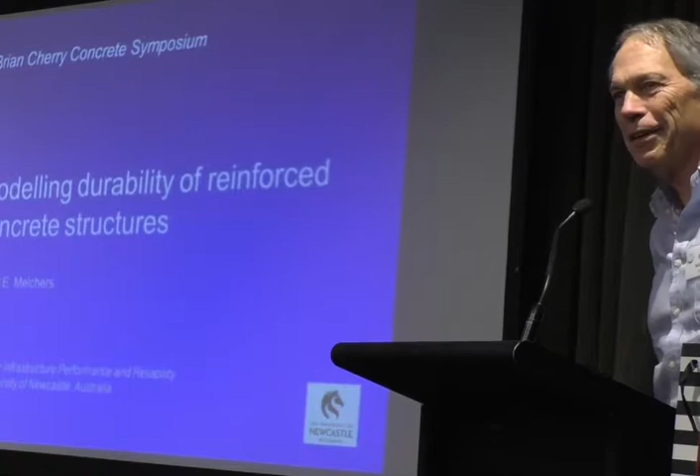Thank you, Bruce, and thank you, organisers, for inviting me to come and say a few words in honour of Brian. As Bruce has already mentioned, I first met Brian when he was brand new at Monash and I was a brand new research student, and he came walking in there and I could hear him coming, and I thought, this guy's from Cambridge. It was kind of scary.

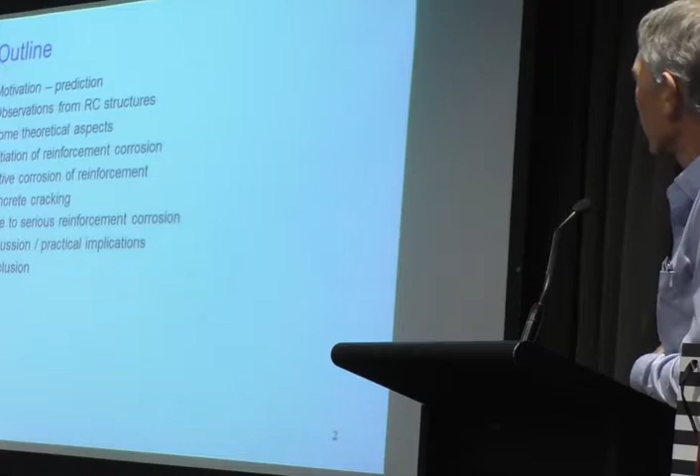Okay, I'm a structural engineer by background, and I'll later on explain to you why I'm actually looking at this. But let's talk a little bit about what I'm going to talk about. I want to talk about the background, why we're actually doing this, some observations from real reinforced concrete structures, not just experimental work, a brief rehash of just a few experimental aspects which have already been covered in a sense by previous speakers, but they're important. Then I want to focus on two areas: the initiation of reinforcement corrosion, and I want to separate that from active corrosion, and Warren's already told you about that a couple of times this morning. And then say something about concrete cracking, because I think that's an area that we have kind of overlooked, and I think it's really important. Then the model, if you like, which is extremely simple, and then some practical implications.

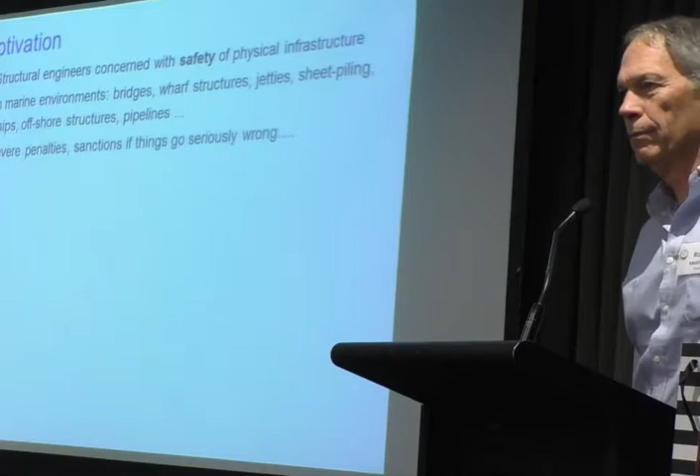So let's talk about why we do things. Structural engineers are concerned with the safety of physical infrastructure, buildings, bridges, you name it. There's a whole host of them. And if we get it wrong, in some countries I'll get shot, in other countries I might go to jail or get a heavy fine. So it's not a picnic. We've got to get it right.

And increasingly, we're talking about the lifetime management of structures. It used to be once you just build it and forget it, and someone else many, many years later picks up the dregs of what you've built, what's left over. Increasingly that's changing, and increasingly there's now emphasis on, can we predict at the start, when we even are designing the structure, how long it's going to last and what we have to do to make it last a long time. What do we mean by a long time?

For most structures, buildings, bridges and so on, maybe 100 years is the maximum. But if you get into that business about nuclear waste containers, for example, you're talking an awful long time. And I don't know how we're going to predict that, but fortunately I don't have to worry about that. But we do talk to some of the nuclear corrosion people, particularly in Europe, who are very much worried about those sort of lifetimes. The main materials, as we've already been pointed out, are reinforced and pre-stressed concrete and structural steels. I'm not going to say anything about structural steels, but they sit in there as an important component.

We've heard a lot about CP of various sorts and coatings, and that's great. But I remember some years ago having a couple of days with a senior bridge engineer from another state, and we looked at lots of bridges, mainly reinforced concrete bridges, and he said, oh, these have got cathodic protection on them. We don't know anything about it anymore. The systems don't work anymore. It's all deteriorated and we don't know what to do. If only we didn't have to have this stuff.

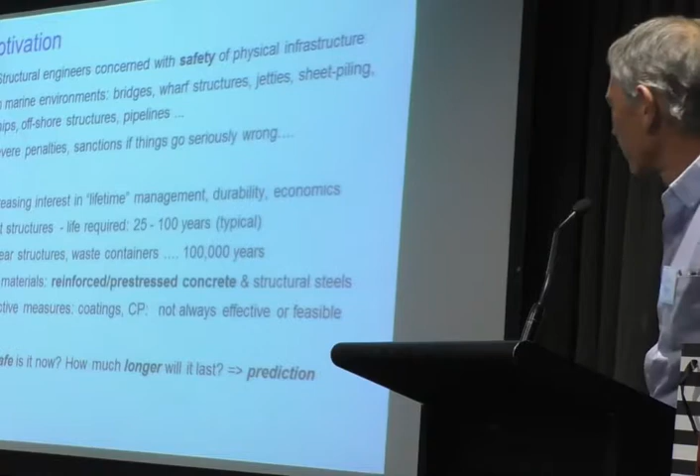So, our question is how safe? Not only just how safe is it now, but how much longer will it last, and that requires, obviously, prediction. I can say anyone can predict, but at what accuracy? And what we don't want is hocus pocus. There's an awful lot of people out there who are selling hocus pocus. I think some of you all know what I'm talking about.

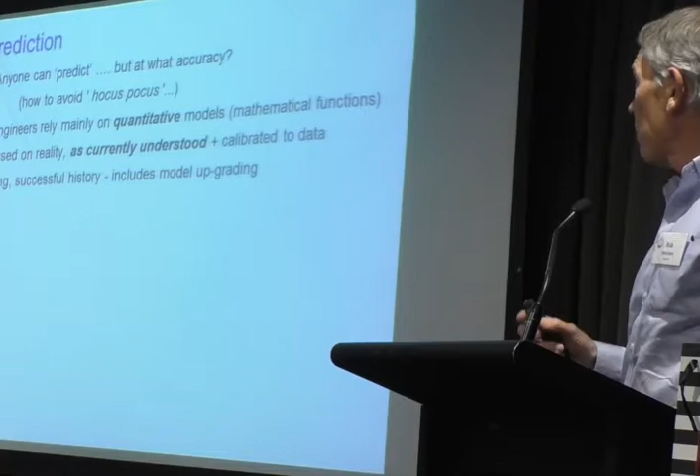Engineers rely mainly on quantitative models, in broad terms, structural engineers in particular. They are based on what we currently understand, and they are calibrated to real information, information that we get from the field and from past experience, sometimes from the laboratory, but the field experience is really important. There's a long and successful history, certainly in structural engineering, of doing that. And it also includes that the models get upgraded as time goes by. So we learn from previous experience, the old models have got to be upgraded in some way. And that's relevant, I think, to what I'm going to say today.

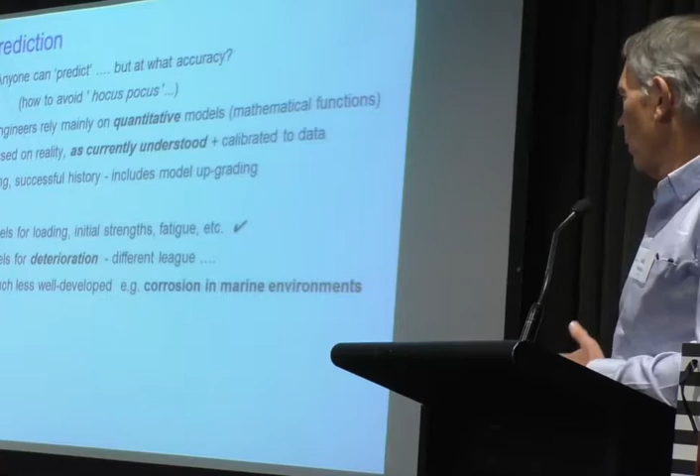The models for loads, for strengths, when we first build the thing, and for fatigue and so on, are pretty well understood, but the models for deterioration on the whole are rather bad. They're not very well developed at all. Corrosion is one of those, and I'm going to talk only on corrosion in marine environments. Typically the corrosion literature will give you things like, oh, it's very corrosive, or it's medium corrosive, or not corrosive. Well, I'm sorry guys, that's not good enough for us. We need to be much more specific. And also you get things like, well, this is better than that, that's better than something else. That's also not good enough. We need to be able to do better.

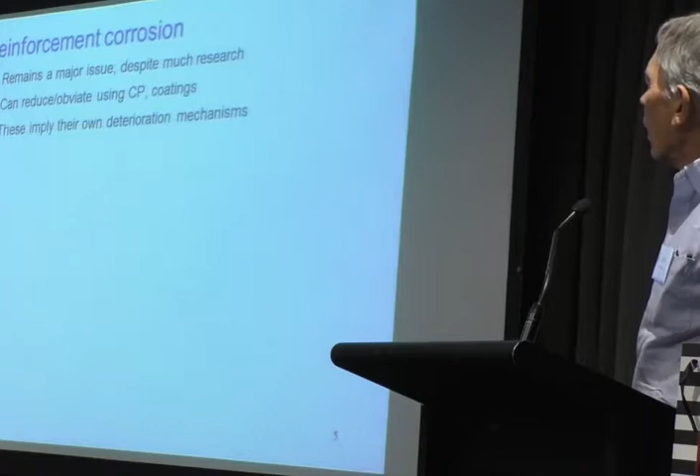So, quantitative prediction, reinforcement corrosion, as we've heard, is a major issue still. I didn't know what anybody else was going to say. But we can reduce it. Their own deterioration mechanisms, I've mentioned that already.

Research approaches. How can we actually look at corrosion behaviour? We can do it in a laboratory, and typically that implies relatively short-term experiments, a year or 2 or 3 or whatever. That's already a long time. And if you think about most PhD programs, they run for 3 years, so you can't design a program that runs for more than about 2.5 years because you've got to give the poor devil time to write up. Then you have to ask the question, how relevant are those results in terms of practice if we're talking about 50 or 100 years for the real structure?

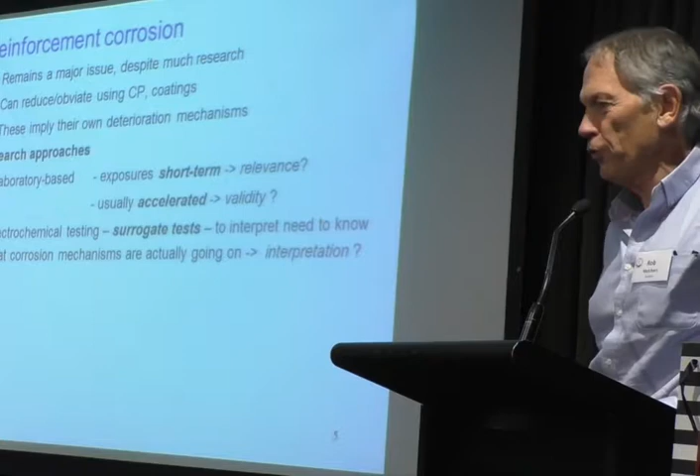We can accelerate them. We can apply currents, for example, to the reinforcing. And then the question is, how valid is this? I've got some bars sitting in my office, reinforcing bars. One lot came out of a real structure that had been exposed in the 1930s and was dug out of the concrete, I don't know, about 10 years or so ago. And I've got another couple of bars that were in a reinforced concrete slab that one of my colleagues tested in our laboratory with impressed current. And you just feel the surfaces and they're completely different. And you think, on that basis alone, what can we say about accelerated testing?

It's dubious. The other thing that's often done, and you've heard a lot about this, is electrochemical testing, but you've got to remember, you've got to put it in context. And if you look up some good books like Scully and Kelly's book, for example, and some other works, you'll see they are actually surrogates for the real thing, and they have to be interpreted. Now, you can't interpret them if you don't know what the actual behaviour is. So there is a problem.

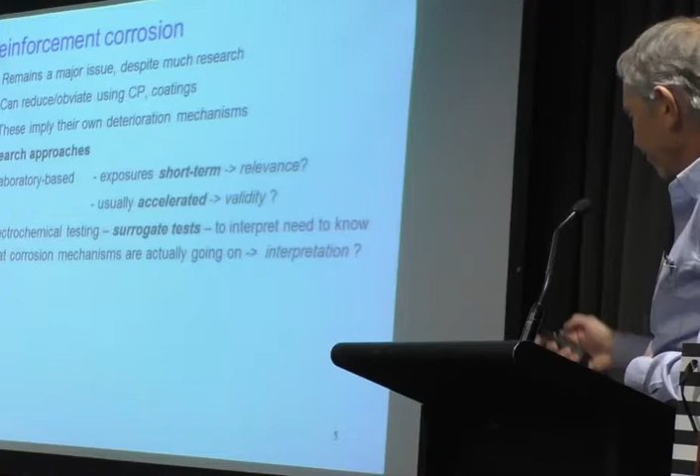The other approach, and the one we're really following, is what we might call an archaeological type of investigation, where we look at real structures, existing structures, particularly ones that have survived for a long time, and ask what can we learn from that. The only problem is we've got to reconstruct the context, the period of time over which this thing survived, what actually happened to it in its whole life up until the point that we look at it.

That has some issues, but fortunately for most of the things we look at, we can pretty well say it's more or less the same as it is now, unless we know there's been a major change of use or something like that. For many structures, they have more or less the same environment as when they started. Forget climate change for a minute.

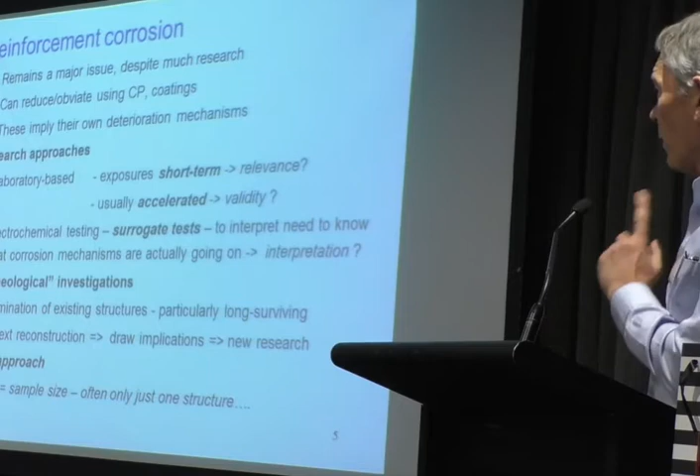So that's our approach. Now one of the problems with that, typically, is sample size. If you look at just one structure, you say well that's what happened to this thing, but if there's something slightly different about it, would we have got a different result? Fortunately, we have been able to find just a few cases where we have big sample sizes.

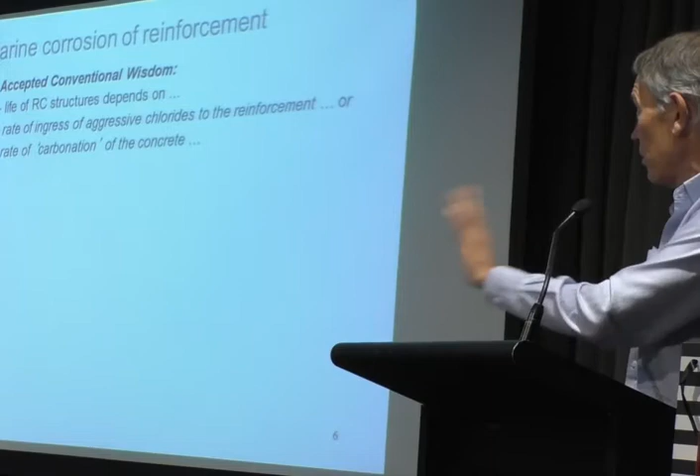The accepted conventional view is: the life of the structure depends on the rate of ingress of aggressive chloride to the reinforcement, or the rate of carbonation. The professional opinion is to reduce the ingress via diffusion, use dense concretes with high cover, use additives perhaps to reduce pore spaces. I'm not going to disagree with any of this, but what I'm going to focus on is why.

Sorry, something seems to be going on. I seem to be pressing the wrong button.

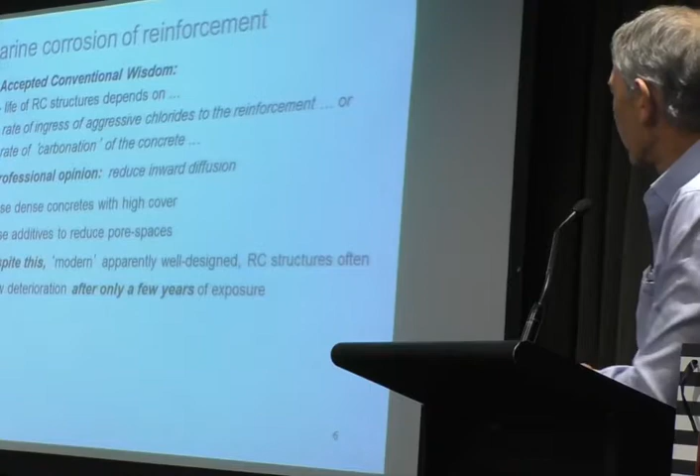Despite all this that we know, if you look around there are lots of concrete structures that haven't survived for very long, maybe 20, 30 years, and then they're in a bad state. So there's something we're doing that doesn't guarantee long-term behaviour necessarily.

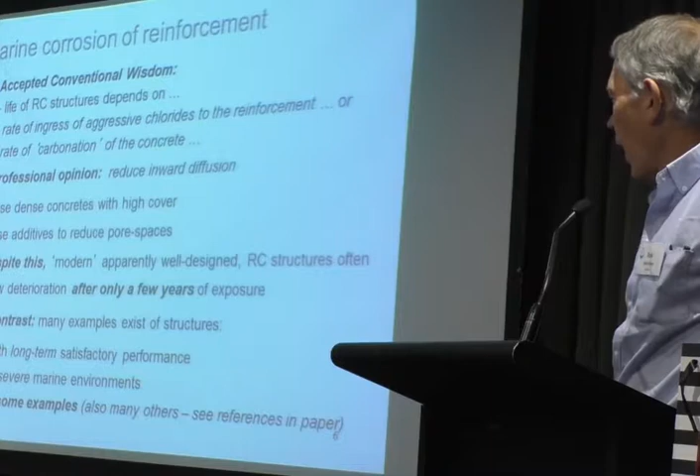But if you look around some more, there are some structures that have lasted a long time, in quite severe environments, and I'll give you some examples of that. I think we need to understand why those have lasted such a long time.

Now, in the paper you've got there's a different example to the two I'll give you, just so we have a broader case, and there are lots of other examples in some of the papers I refer to, because we have systematically gone through a lot of structures. I'll just give you two, including our most recent one.

This is the Hornibrook Bridge, built in 1935 just north of the city of Brisbane, I think in a suburb called Redcliffe. It's called the Hornibrook Bridge because it was built by a supervising engineer and financed, I understand, by Sir Manuel Hornibrook, who has a well-deserved reputation, at least in structural engineering in this country. It's 2.7 kilometres long, on Bramble Bay.

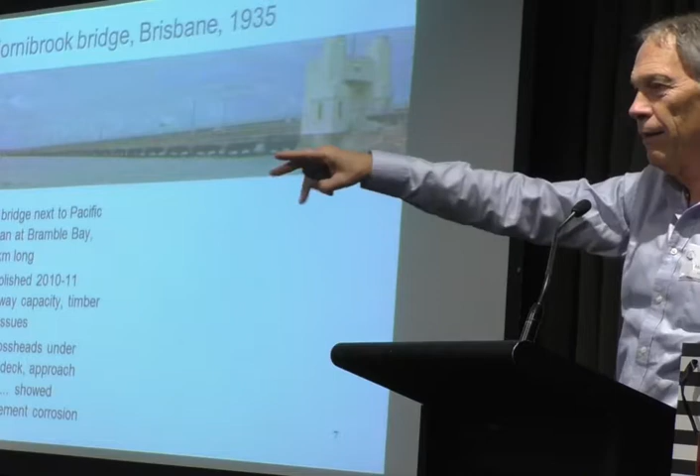It's right next to the Pacific Ocean on the other side, and there's quite a large tidal range. At low tide, at the bottom of all those piles you can see there, you can see the sand. So there's a big tidal range, and this is supposedly the worst exposure environment you can have for reinforced concrete.

It was demolished in 2010-11, basically because the superstructure was a timber road bridge that was already totally inadequate, too small, and all that sort of stuff, and for political reasons they decided to pull the thing down. We were alerted to that by an engineer in Brisbane, who said come and have a look at this — the piles they're pulling out are fantastic.

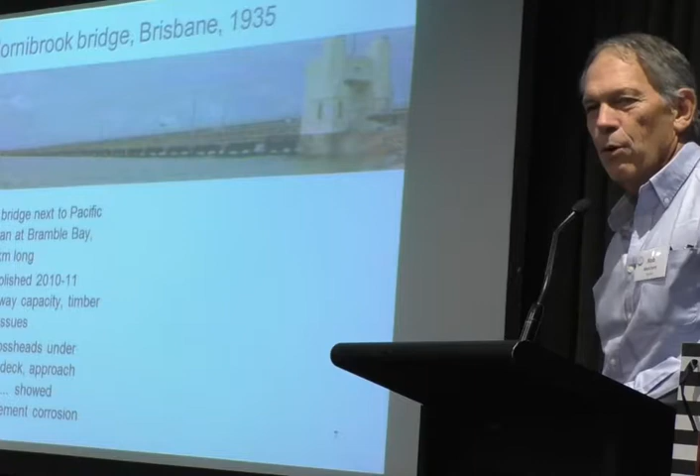There's no sign at all of corrosion. So this is 80 years. The crossheads, they weren't quite so good.

These are the reinforced concrete beams on the approach spans, and these are the three piles with the crossheads. The crossheads aren't too bad, and the beams here are not terribly great. But then we look at the piles, and there's virtually nothing wrong with them.

It doesn't say so on the slides or in your notes, but Warren reminded me before to explain why there's a difference. The big difference is that the piles are Class A concrete — they've got much more cement than the rest of the structure. The crossheads and approach beams are Class B concrete, so they have lower cement content.

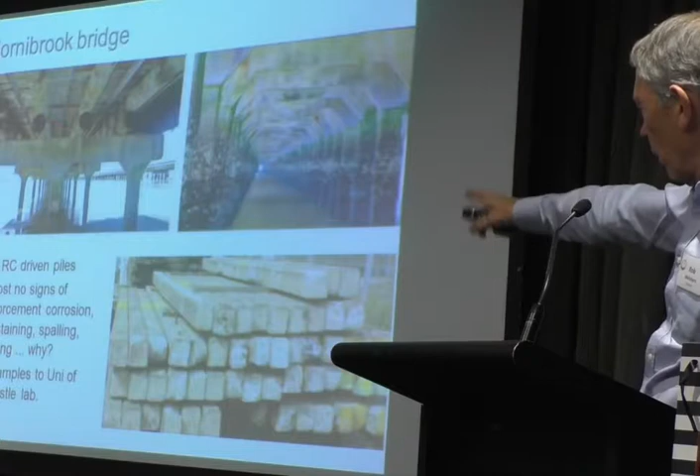I'm just going to focus on the piles. There are nearly 900 of them. This is just a snapshot I took when I visited the demolition yard. You'd be hard-pressed to find anything that's got anything wrong with it — they're all in fantastic condition, and these were in a tidal zone, remember.

So the question is why — what's going on there? We were able to persuade the department up there to let us have some random samples. They just selected the piles and sent them off to the University of Newcastle for us to look at in detail, which we did.

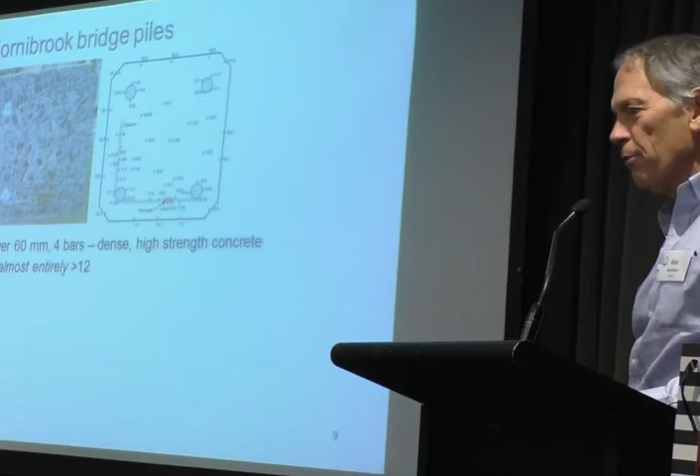Now, this is just a typical example. You can see the concrete on the left-hand side, a cross-section of the piles. They were just cut with our massive concrete saw. There's virtually no sign of reinforcement corrosion anywhere, just a little tiny spot at the bottom where one of the ligatures has got a little bit of corrosion.

The other thing that's noticeable is that all the pHs on the surface here are all around 12. Now this is after 80 years, right?

The concrete chloride levels were way above threshold level. Way above. Doesn't matter where you look, it's above a threshold level. I think the normal threshold level is about here somewhere in this range. And the bars are about there.

The concrete was extremely hard. Our lab guys got them to dig out some of the bars, as you can see down the bottom there. They busted the bits on the jackhammer. The concrete was 60 MPa or so.

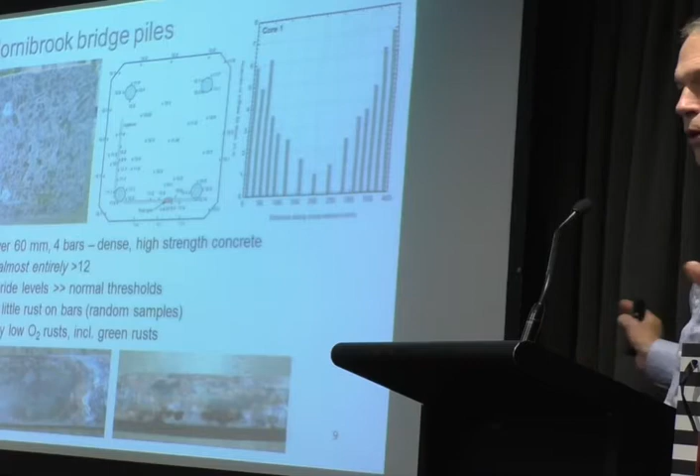The bars that were recovered showed either no corrosion at all, like the day they were put in, or they had a little bit of rust that was basically, as Warren mentioned earlier, like green rust. Now, green rust, you've got to remember, only comes about when you have virtually no oxygen. So that means there was virtually no oxygen in that area at all.

However, and I'll come back to this case later, one of the piles, when it was being pulled out of the ground by the demolition contractor, showed something they didn't expect. He said to me, come and have a look at some photos I've got in my office. I thought, this could be interesting. But these are the photographs.

What he found is that when the pile was being pulled out, it had actually kinked. And that is the area of kinking. And now have a look what's happened here. This relates to some of the things that Jack's been talking about as well.

That's the cross section. Two of the bars, I've got to be careful what I'm looking at, have been flame cut. This side here is rust staining. This is where the concrete was fractured. And here you can see the bars basically disappeared. So on that side, that bar and that bar were basically like this. Nearly all the steel had gone.

Now the first question you ask is, how did this come about? The next question is, where did the steel go? There was no rust, just a bit of water stain, just a bit of rusty stain. There was no rust on the outside. Because when we inspected those after we isolated them in the demolition yard, just to make absolutely sure, there has to be a mechanism for getting rid of the rust.

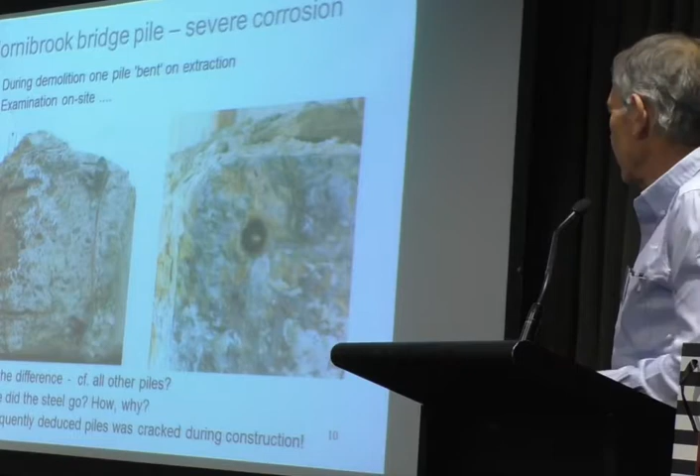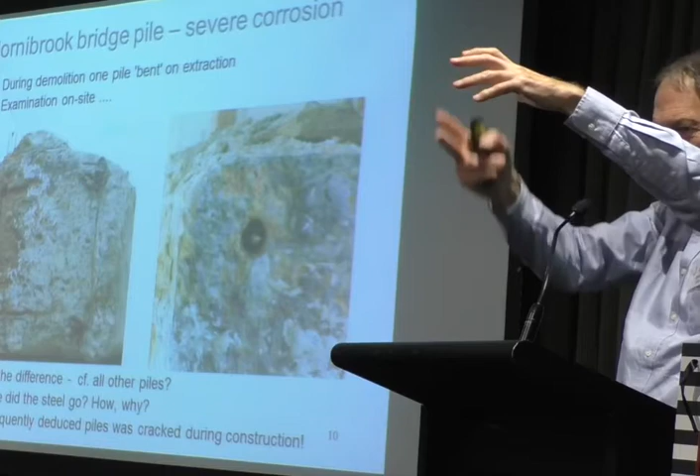And then we looked at it a bit more from a structural engineering perspective. We decided, this thing cracked a long time ago. Could it have been cracked during installation? In other words, was it bent because they were cast lateral this way? You could tell because one side was rougher. And if you then look at it, it would have been lifted up and had cracked, and the crack had been there all those 80 years. And during that time, this happened.

Actually, the case that started me on this whole business, because many years ago I decided I wasn't going to get involved with reinforced concrete corrosion, just stick to steel and seawater, was this case here. If you ever go to Arbroath on the east coast of Scotland, there's a little place where they have smokies, which is smoked fish. I happened to walk along a coastal path there one Sunday afternoon because my wife had gone home already. She left me in Scotland, and what else do you do on a Sunday afternoon in Scotland except go for a walk along the coast? And I came across this thing.

We now know, at the time we did all the investigation, it was 65 years old. The seawater washes over it in the wintertime.

There's a lot of rain obviously over there.

It was constructed during the Second World War. It's about 1.6 kilometres long. It would have been low-level technology, and the bits of interest are the handrails.

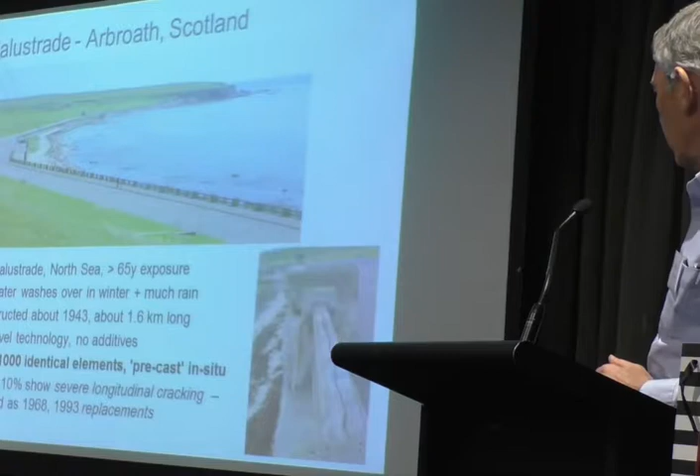You can just see them in there. I think I've got another picture of them. Yeah, these handrails, those bits in there. They were all precast because the verticals were cast later and you can actually see it from the construction. But there are nearly 1,000 of these.

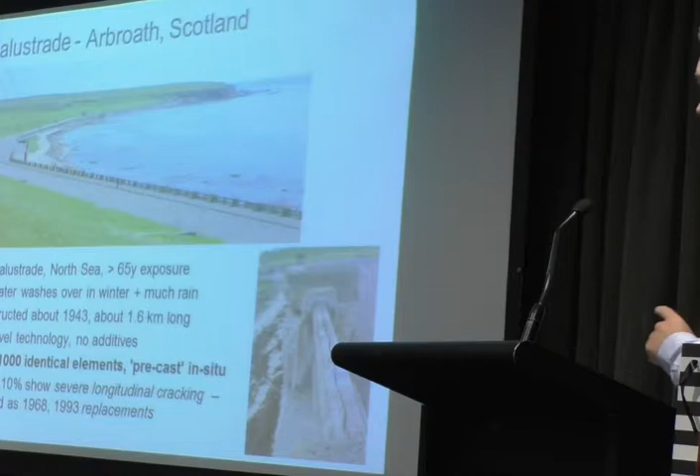Now out of that 1,000, we discovered that some of them had cracked really, really badly, and that was about 10% of the whole lot. But when we inspected the concrete and talked to the local council and so on, we found that these were replacements for the 1943 ones. So 90% of the 1943 ones were still there. It's the ones that had failed that were built later as replacements.

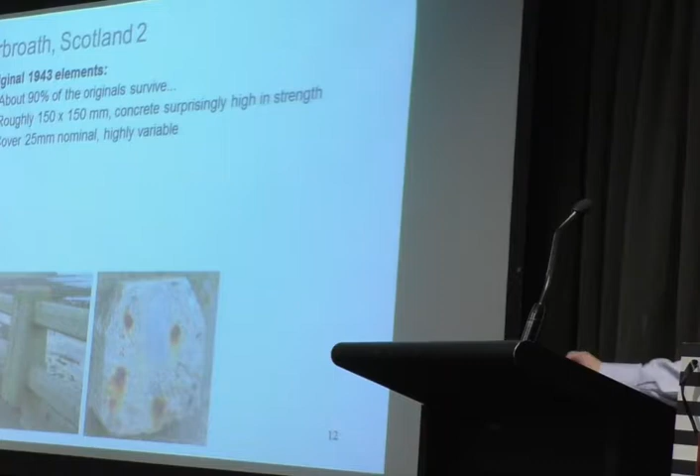And then you have to ask yourself, what's so special about the 1943 ones? So we did that—you can see the size, roughly the cover. This is not really high quality construction. Look at the size of the aggregate, look at the cover. And this is just a random sample that someone else had cut. So it wasn't exactly high quality concrete.

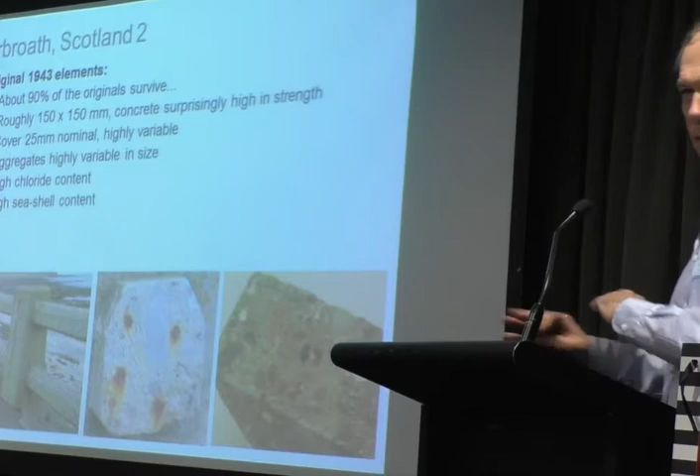And when we looked more closely, what did we find? Seashells in the aggregate, in the concrete. That tells us pretty well that they just used the local seashells, this local sand, and mixed it with seawater, so it was full of chlorides right from the beginning. And yet it lasted 60 odd years.

We know that seawater was banned in the 1960s, but it does tell us there's a high calcium carbonate content in that concrete. And that sort of worried me.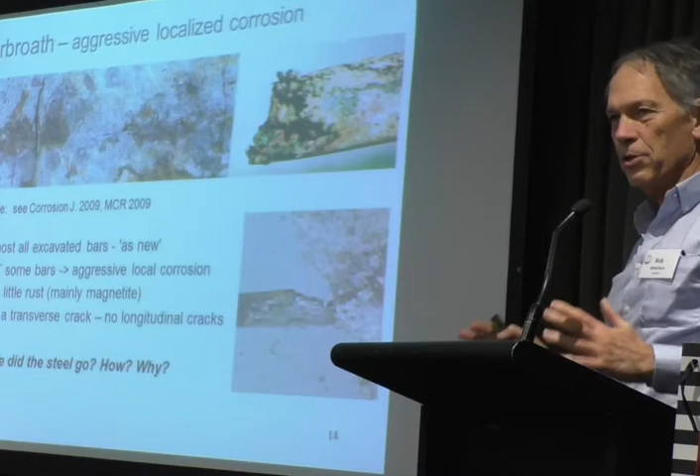At one time we had some samples, fortunately, that the local council allowed us to take out of those handrails and take back to the lab at the University of Dundee and later on elsewhere. And one day we were breaking up one of the samples that were left over, and I must say I got the shock of my life.

This was one of those handrails, and here should have been a bar, and there wasn't—there was nothing left. If we go back further along in this direction, this is what the end of the reinforcement looked like. And I thought, what's going on here?

And if you look more closely, sometimes you saw this, but the important thing is that it always occurred where there was a crack in the concrete. And of course that ties in with the picture I showed you before, and I think Jack's shown a few times already. So again, the question is, where does steel go, how and why, and we'll come back to that.

So out of that came the question of, well, we need to rethink, because I looked at the current literature at the time, which I sort of understood, and I thought, this doesn't make any sense. These cases don't fit what the textbooks tell us. And the model you've heard a lot about already is the so-called Tuutti model.

That goes initiation time and then corrosion starts. And the more we looked at lots of examples—which I'm cutting through a whole lot of work here, months and months and months of literature survey that I'll come back to in a minute—we decided in the end there's something funny about the way it works.

We get initiation, small amount of corrosion will occur. This is corrosion loss, if you like, or damage—whatever, doesn't matter. No, not damage, corrosion loss. Damage is different. And then nothing much happens. And then only later on do you get this active corrosion.

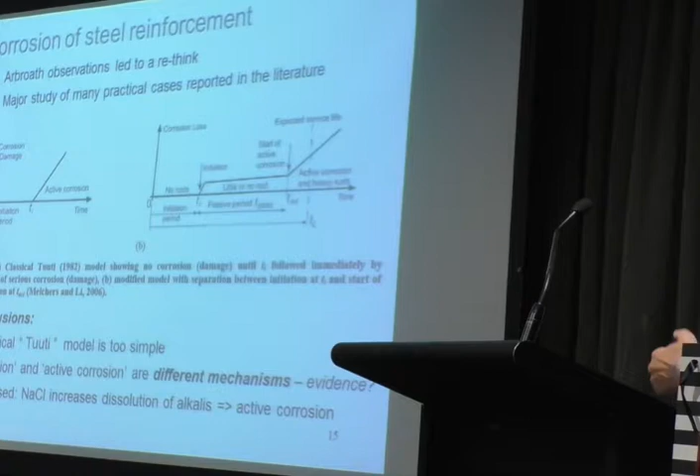Now, we proposed that in 2006 on the basis of the information we then had. And we argued that the mechanisms involved in the early stages—that's this initiation period, and this here—were actually completely different. Now, if you think about it, if the concrete's really bad, it's possible that it just goes straight up here. But I want to talk about good quality concretes, and I'll come back to that. So the classical Tuutti model, or whatever you want to call it, is too simple and so on.

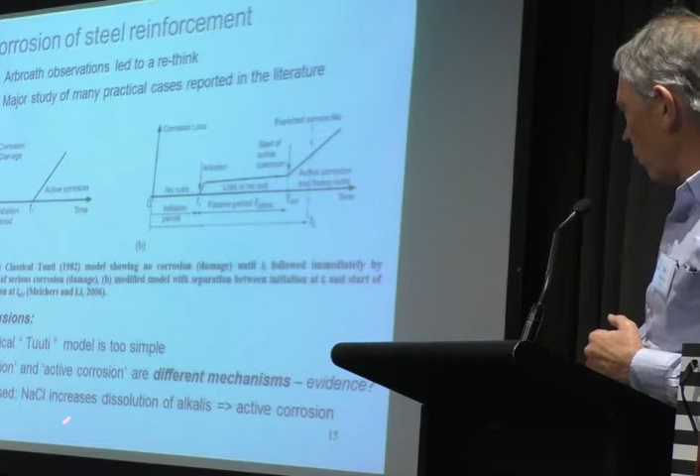We had this notion that the most likely thing is that somehow the chlorides, in particular sodium chloride, increase dissolution of the alkalis in the concrete. There was a little bit in the corrosion literature suggesting this was a possibility, but we had no evidence. So we just put it out there and said, this is what we think is happening. And the paper got published anyway, so it must have been all right.

Now, I also mentioned we did a massive study of the literature. We just went through report after report after report. For structures in the United States, this was really good because they would tell you what type of aggregate was used in a particular state to build whatever bridges were available. It's much more difficult to do in the UK or for Australian bridges. We don't have too much limestone in this country that's used, but in the United States there was a lot of limestone used.

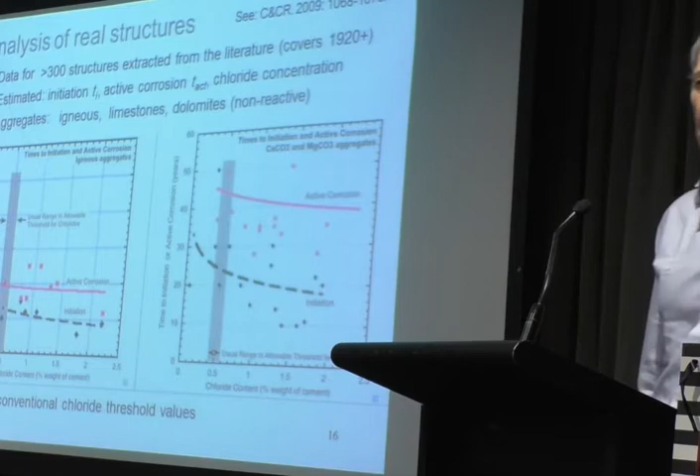On that side, I've got the results for igneous aggregates. So we've got here chloride content, and this is pretty fuzzy - there's a fair bit of fuzziness in that result, but that was our best estimate. And also the two times that I've got here: the time when we thought initiation occurred, typically from the reading in reports when they first saw signs of some sort of rust staining, to say something's going on but there was no significant damage to the structure. And then later on, in later reports, they reported that something serious was going on. Now, these numbers are somewhat rubbery.

I'll be the first to admit this is for igneous aggregates. And what I've already taken out of these is the cases where there was alkali aggregate reaction, because if you read the original paper, that's in there, and there's a difference. So we said, no, that's another mechanism, we don't want to know about that, so that's out. If you look at the cases where they used dolomites, or non-reactive dolomites, and calcium carbonate or limestones, both of these times go up quite a bit.

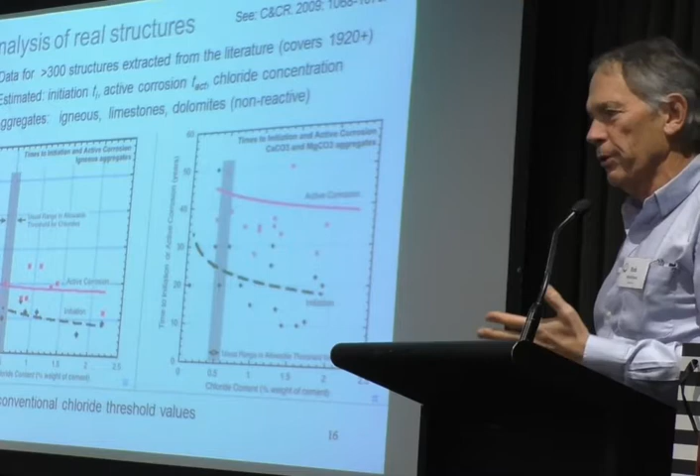And of course, in retrospect, that makes sense because we've actually added more alkalis to the solution. But I was very, very worried, and I wrote a paper about this quite a few years ago, saying, what's going on here? Calcium carbonate is supposed to be bad, some people tell us, but it's actually a bit more complicated.

Note that the conventional chloride threshold values are those grey bars that are up there, and we're talking about a lot more chloride than that.

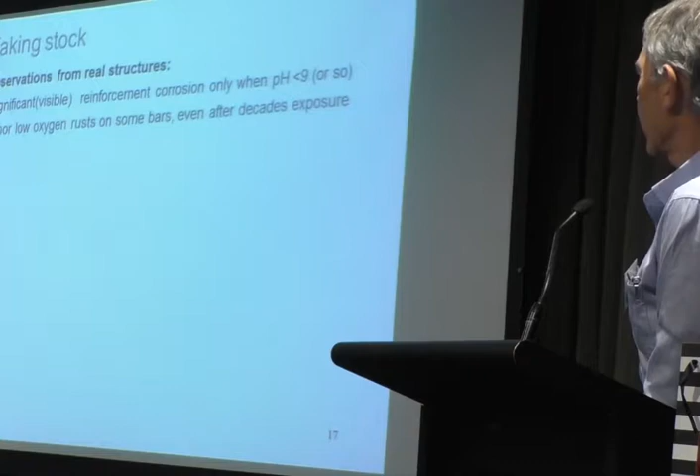Taking stock, so what have we got? Observations from real structures tell us significant reinforcement corrosion only when the pH is less than 9 or thereabouts. Minor low oxygen rust on some bars even after decades of exposure. Some concretes still have very high pH after decades of exposure. Why? Very high chloride levels do not always cause corrosion - that's what we can deduce from those cases. Again, why? More questions.

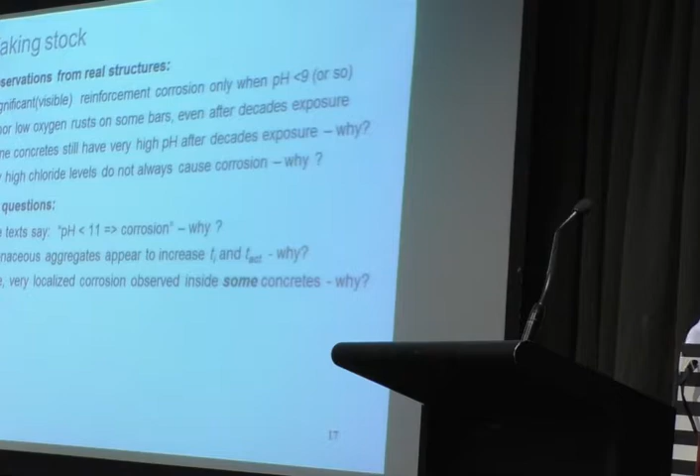Now, some texts talk about pH less than 11 causing corrosion, and you think, well, hang on, what's going on? That doesn't quite fit this scenario, but we'll come to that. And calcareous aggregates appear to increase both of those times, and we have to ask why - I've sort of foreshadowed that already. And severe, very localised corrosion is observed in some concretes, right? And again, why?

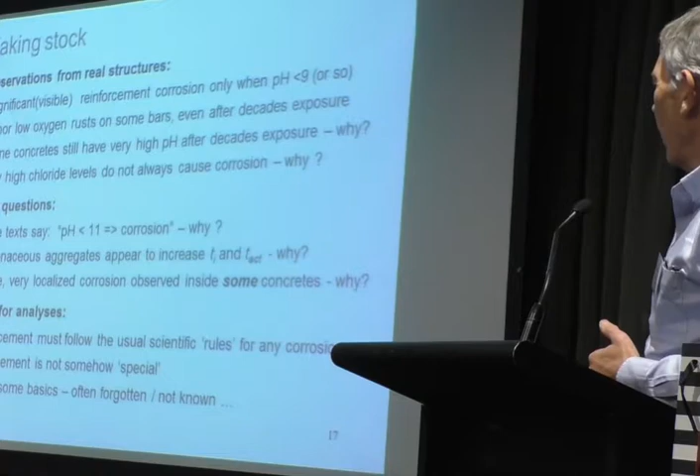So, the way we thought about it was, well, reinforcement corrosion isn't all that different from any other corrosion, it's just that the environment's different. So the same sort of rules must apply. It's not somehow special. And there are some aspects that I think sometimes we forget. The key factor is the environment. Initiation of corrosion can only occur when those thermodynamic requirements, the Pourbaix diagram and so on, are satisfied. And that tells you, as we've already been told this morning, it's only when corrosion is possible, not the rate. And that's the bit that really is important for us.

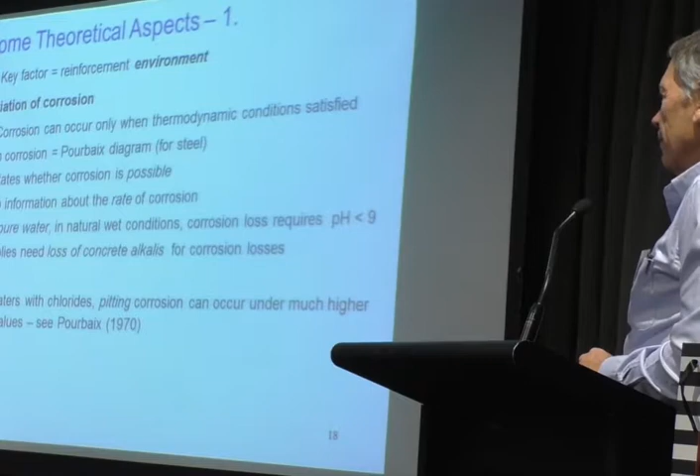In pure water, in natural wet conditions, it requires pH less than 9. Now that implies that somehow or other we've got to get rid of some of the alkalinity. Otherwise nothing will happen, except when we have chlorides present, we can have pitting. And you can read about that in Pourbaix's 1970 paper. So there's a difference: pitting versus overall corrosion loss. And even in new concretes, we know that pH is around 13. It is possible, according to Pourbaix's 1970 paper, to have pitting, but you need oxygen.

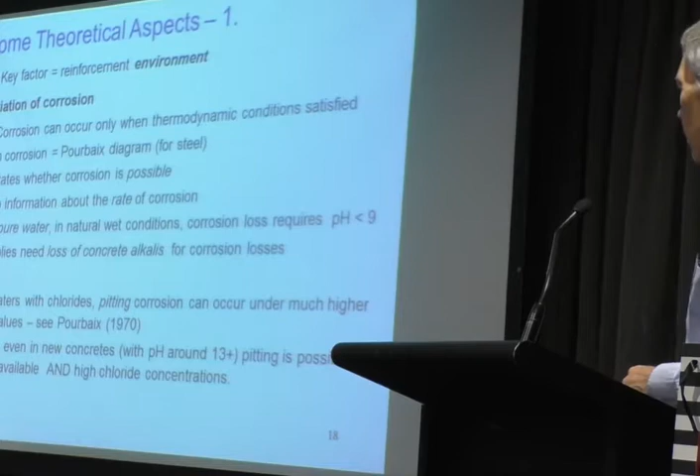And of course you need high chloride concentrations. If one of those is missing, then it doesn't happen. Progression of corrosion - now this is the other bit that's important.

In pure water, in concretes around the steel, the pore waters are stagnant. It's sometimes forgotten that it was shown already many years ago that in those conditions, the chlorides play virtually no role at all in the corrosion process. That was shown more than 100 years ago by two guys in Germany - it's a nice German paper, you can have fun reading it - and they looked at lots and lots of salts, made almost no difference, provided it was stagnant. And why is that?

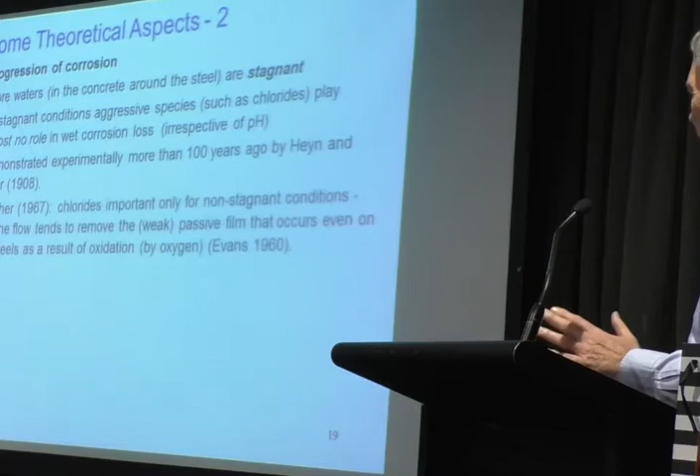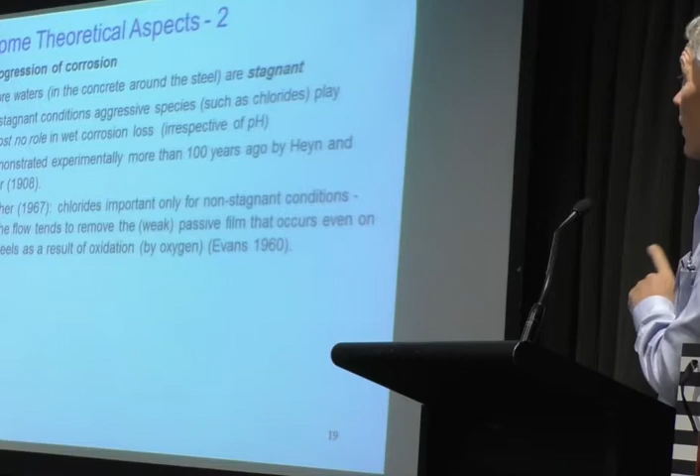Well, if you go and read Evans's book, even things like carbon steels form a very weak passive layer, right? And he showed that - you can read his book, how he did that. And Dora Brasher in 1967 threw some light on this and said the chlorides are only important in non-stagnant conditions, because then you actually damage that oxide layer.

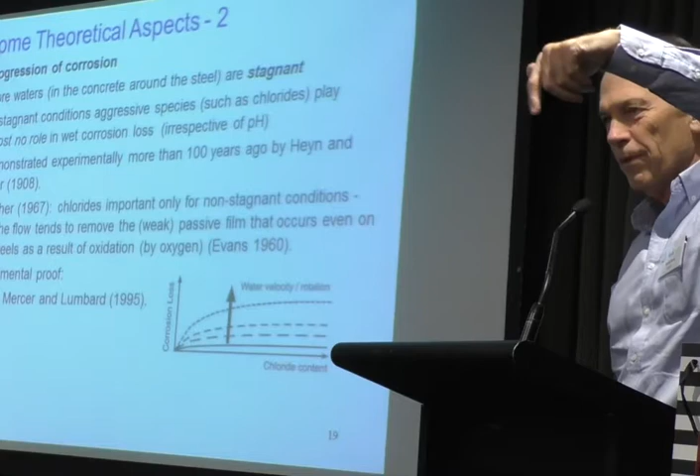And if you look at Mercer and Lumbard's - I think a very nice paper published in the British Corrosion Journal before it changed its name - showed that very clearly, that if they used rotating electrodes so they could control it from zero rotation, it didn't matter what the chloride content was, nothing much happened. But as soon as they increased the angular rotation of the coupon, the amount of corrosion went up. So they were destroying, if you like, the oxide layer.

So the stagnant conditions are really important. Now, as Warren has already mentioned to you, most laboratory experiments don't actually use stagnant conditions, right? So yeah, it's a bit of a problem.

So coming back to this now, what can we say about the initiation bit and the active corrosion time? I want to really focus on those. We need to think about what's going on in those periods of time. So for initiation, our approach is experimental.

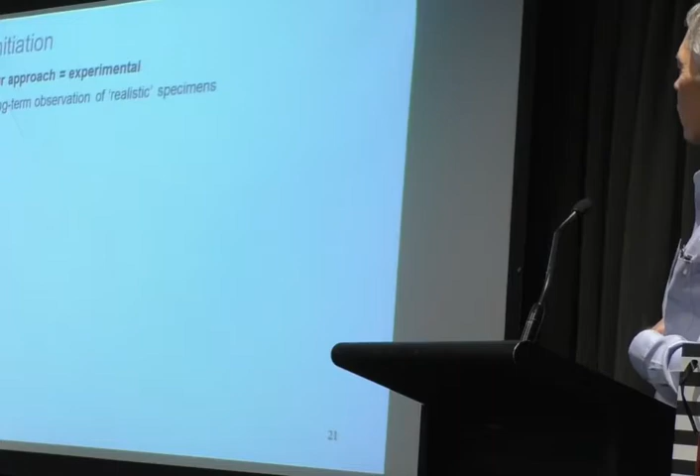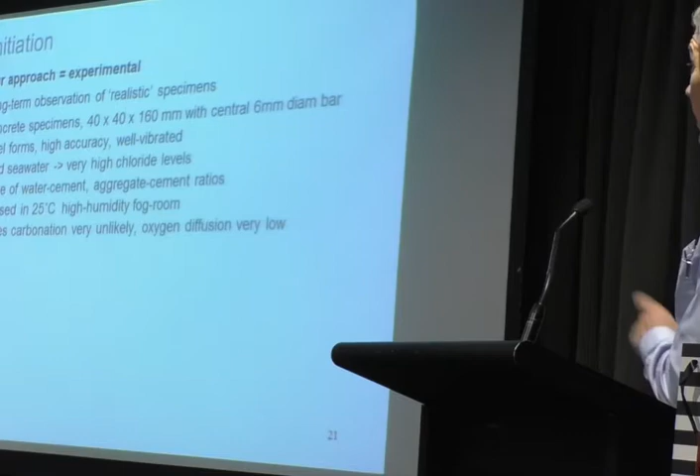We did a long-term experiment where we had very small specimens, 40 by 40 by 160 millimetres, with a central bar. We put them in high accuracy steel forms, all made exactly the same way. We used seawater to start them off, with a range of water cement contents, aggregate cement ratios, fog room, all that sort of stuff. And that actually means we can rule out carbonation as an issue.

And then every year initially we broke open 2 samples to have a look, and we saw nothing for these things. Except after a little while we saw pitting along one side of the bar, if I can call it a side - it was the bottom of the bar, away from the casting direction. So we had them like this: we cast on top, the bar was through here, corrosion was on the bottom.

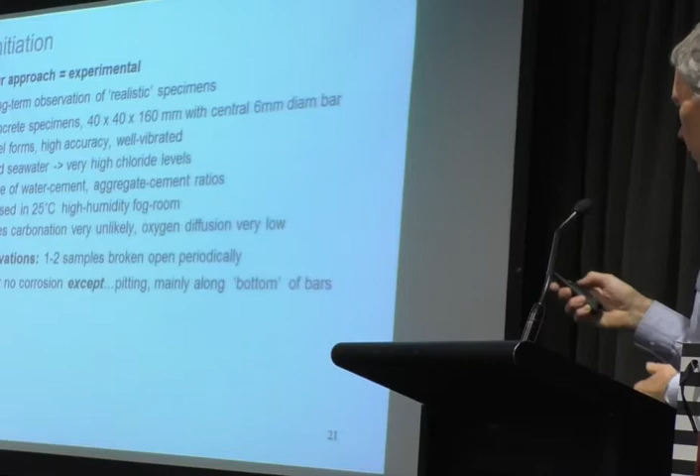And when we looked more closely - let me show you some pictures. Oh dear, I've done it again. Sorry, you can see it there. This is just one photograph of it, and there's heaps and heaps - I can show you lots more. And they are pitting.

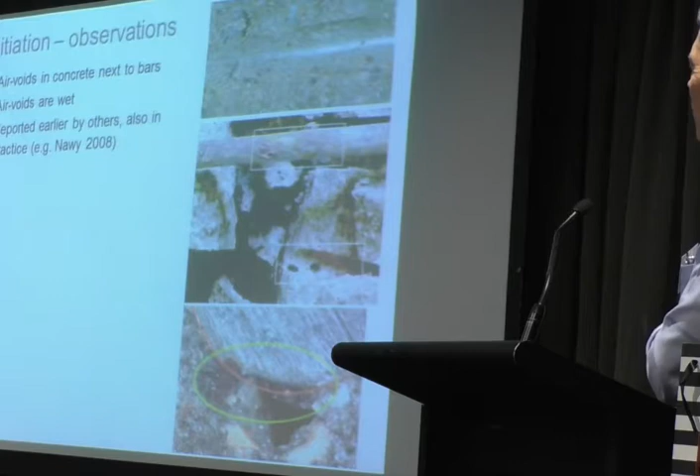And then you've seen a picture a bit like that before. If we then looked at the pitting, it was next to the air voids in the concrete. So the passivation bit wasn't there. You can see another picture here in the middle showing the separated bit, but here's the air voids, and that's where the corrosion was on the bar. And here's another picture showing the loss along - there's a cross section here.

And we now know that, of course, this also happens in practice. There are air voids present, and the voids are correlated with pitting. And the question is, how do the air voids get there?

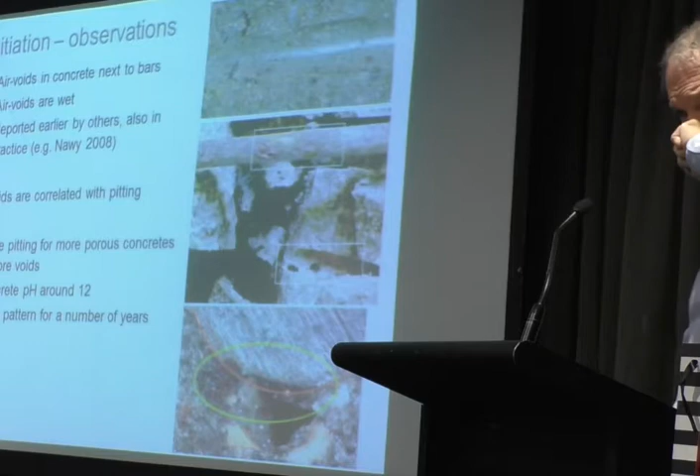In our case, because we had all these different ranges of concretes, some were quite permeable or porous, and others weren't. In the porous concretes, we got bigger gaps between the steel and the concrete, right? So there was more pitting, and that's exactly what we saw. And this is still with concrete around pH of 12. And nothing really changed - we saw that when we first broke them open after about 2 years, to the most recent ones we've broken open at 10 years, and now we're looking at year 13. We see exactly the same, nothing much changes.

So what does that tell us? That changes in that curve - a bit of corrosion occurred and nothing much happened along for the next 10 years or so.

Oh, gee, I'm sorry. So what we're proposing is that something like this happens.

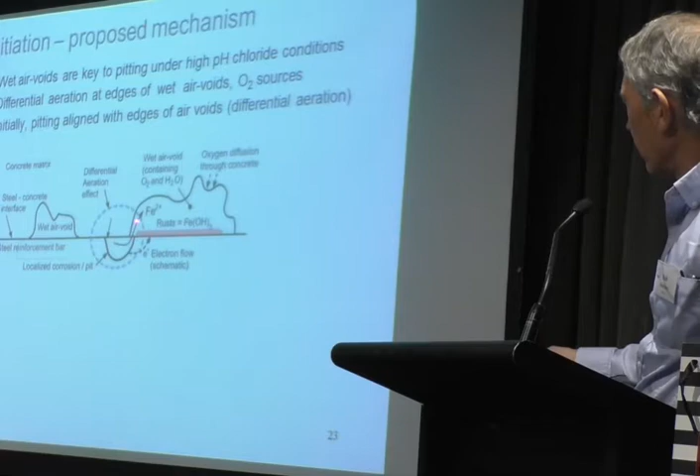You have an air void. This is all concrete around here. At that region, in the air void sits wetness, because all these samples are quite wet. Oxygen and water, even if the oxygen is dissolved in the water, it's still oxygen there. You get differential aeration to start with here, and that happens on this side as well, and eventually it corrodes into here, and all the rust eventually ends up around here somewhere. The point is that this air void supplies a limited amount of oxygen. And when that oxygen runs out, things all stop.

Except if you've got really poor quality concrete, then you get oxygen diffusing in from the outside. A lot of the experiments, if you look at them, have actually been done with not very good quality concrete in the labs. And if you read the paper, I'll give you some examples of that. Yeah, I've talked about that.

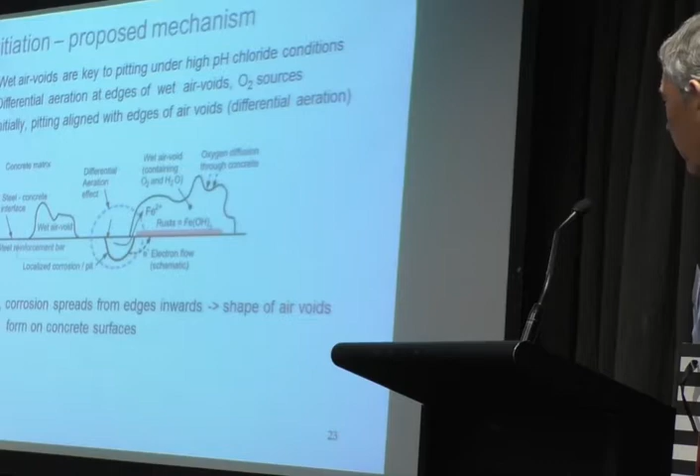So you can get longitudinal cracking, and we're now seeing in our worst concretes in our lab, after 13 years, in the lousiest, most porous concrete, we're seeing a longitudinal crack. So we've now got to the stage where things are getting serious. But there are other issues.

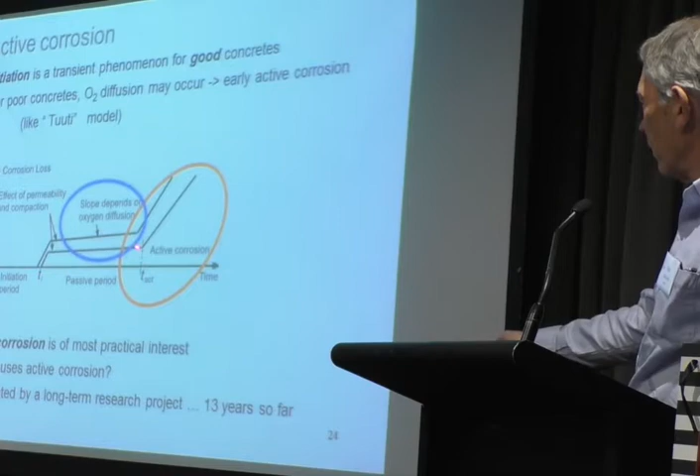So that gets us, if you like, to this earlier stage here, to here. Now in our lab we didn't have this initiation period because we put the chlorides in to begin with. We just saw this and we saw that. I now want to talk about what happens in here. What causes that to occur? Because it doesn't quite make sense. There's something else has to happen.

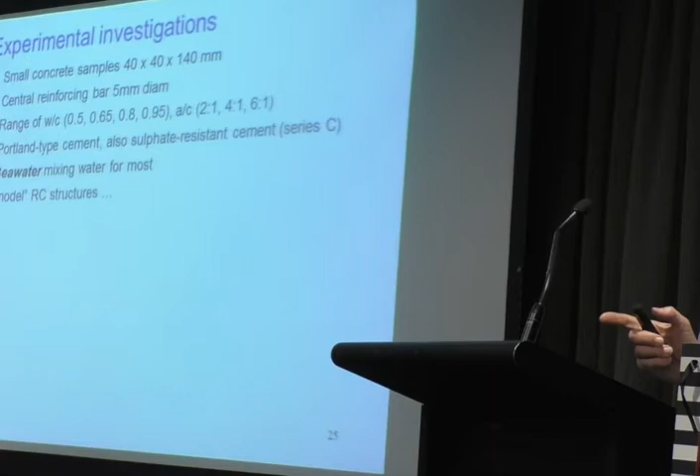So the same experiments were used, but we also used one other lot that was made with sulfate resisting cement. That came about because someone, when we started these experiments, said you ought to try sulfate resisting cement, it's supposed to have some good properties. And I thought, why not? We'll try that as well. It's fortuitous that we did, because we ended up, as I'll show you, seeing some things we probably would have missed completely if we hadn't used this cement.

So we used the same type of models, continual exposure in the fog room. We looked at it every year approximately, looked at the way they were broken open, and photographed them. Again, we didn't see much for many years, but for some it was worse than others. Now this is a typical example.

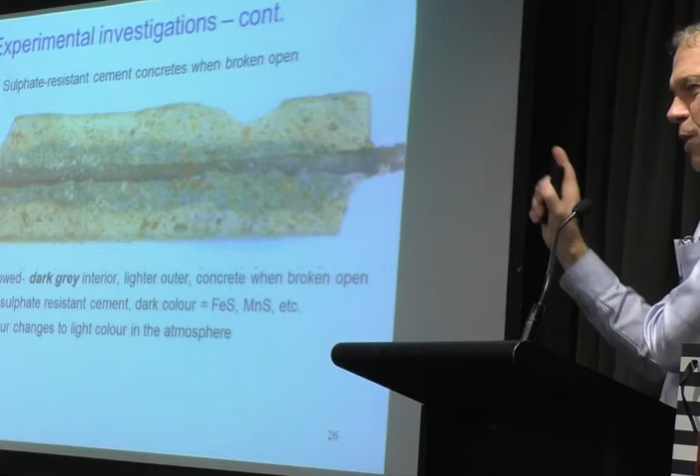concretes, the poorest concretes. And that then said, hang on, there's something going on, there's some diffusion process going on. It takes a while to get your head around what you're looking at. But it turns out we eventually found that sulfate resisting cement has a dark colour because of iron sulfides and manganese sulfides in the concrete mix, and they change to a light colour on exposure to the atmosphere. That's known, you can look that up, but these concretes hadn't been exposed to the atmosphere. This is just after the thing was broken open. So you have to ask yourself, what's going on here? Well, when I say they haven't been exposed to the atmosphere, that's actually not quite right, but we'll come to it.

We then started to look at what is actually inside the concrete, using various techniques including XRD and EDS and so on. To cut the whole story short, the ones on the left still had a lot of calcium hydroxide in the mix - they were still quite alkaline, and they would have been because of the pHs. And the ones on the right, there was virtually no calcium hydroxide left.

So there was no alkalinity anymore to keep the bars passive. So then you say, well, how did that come about? And then you think, the only mechanism that's possible... let me go back. The only mechanism that's possible is that the alkalis leach out.

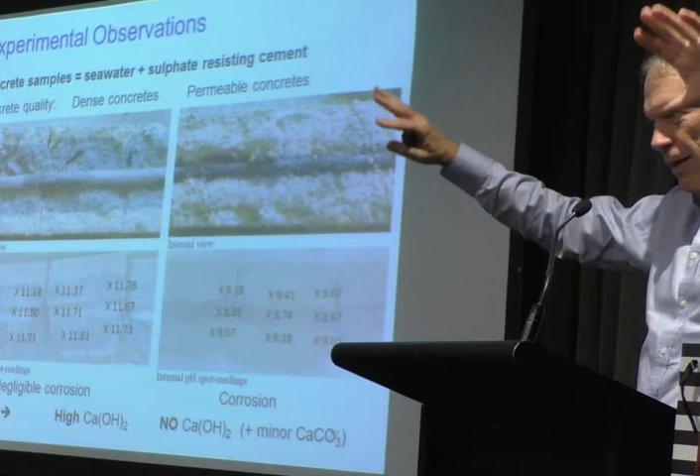And then you ask yourself, is that really the mechanism that's causing it? Because ultimately, when all the alkalis have leached out, then you've lost your alkalinity and the bar can corrode. Yep, I'll get there, Bruce. Now we saw the same.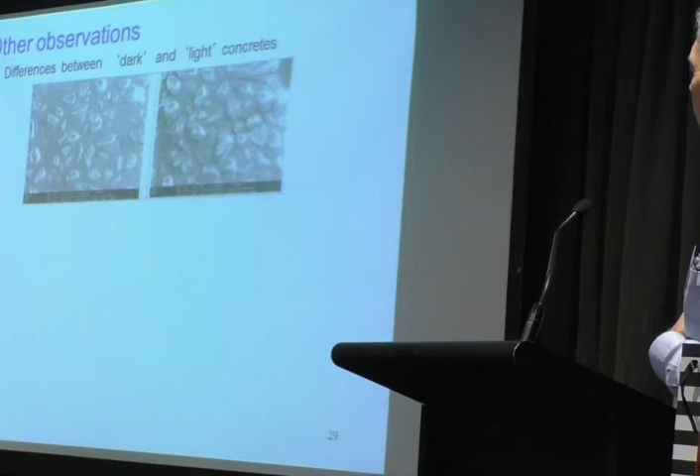And if you look at the very outside of the bars, we often saw calcium carbonate formed there, and that's what you would expect. So, difference between the light and dark concretes - dark on the left side, light on the right. You can see the light-coloured concrete shows channels, much more porous. This was the same concrete mix, same sample, but just out of the dark part and the light part. And if you look under the microscope, you see the same sort of thing. So what has actually happened is that oxygen was able to diffuse into that mix and change the colour.

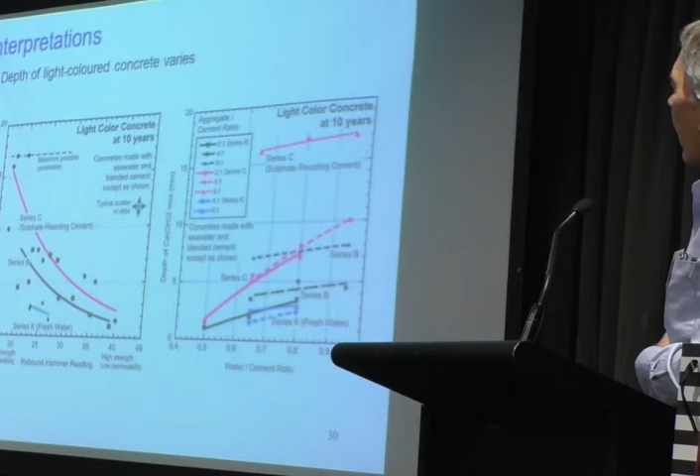If we then look at the depth of the light-coloured concretes between the Series B, which is the ones I've been describing to you, for Portland cement, and also sulfate-resisting cement, which is the red ones. The B ones are the Portland cement, and K is some samples we made with fresh water.

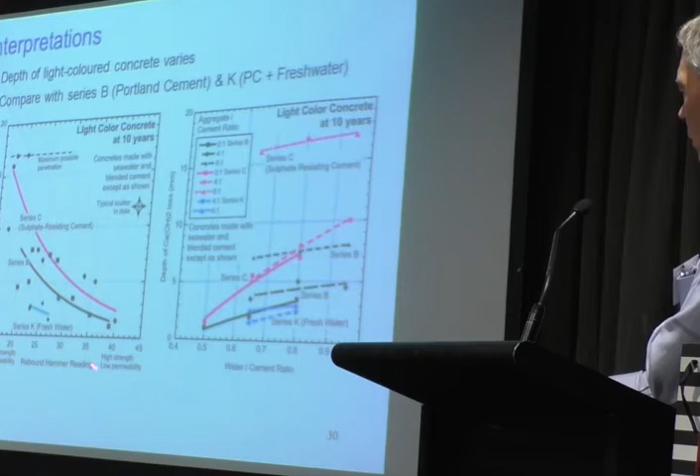Let's just talk about this side only. This is Rebound Hammer readings, which is a surrogate for permeability, if you like. So these are high strength, low permeability, and high permeability there. The depth of penetration of that light zone is much greater for the high permeability concretes compared to the low permeability concretes. And for fresh water, well, not much is happening. For the B series, which is a standard Portland cement mix, sulfate resisting cement actually aren't all that great, as we now can see, but it did unlock, if you like, the reason for what we're seeing.

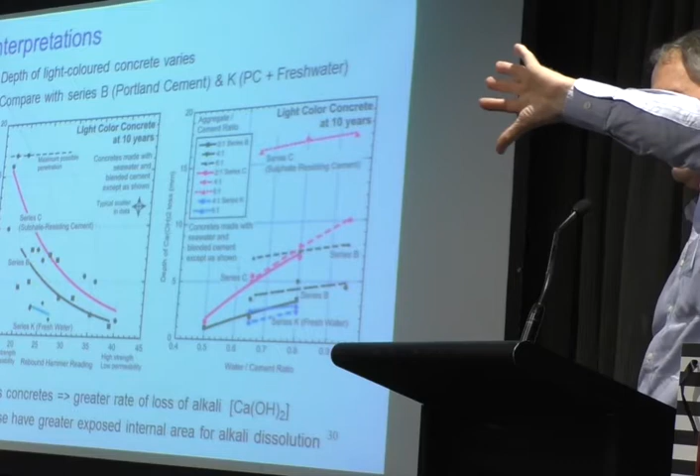So the porous concretes show a greater rate of loss of alkali, and of course it doesn't help because of the internal exposure - if you think about porosity, the internal exposure of the alkalis will be greater if the concrete is more porous. So it's a dissolution of the alkalis, that's the important bit. And that we know is increased by sodium chloride.

Okay, that's probably all I need to say about the overall thing, except a few signs of warning. We saw these - what's going on here? We've got to remember that all the studies on which the current codes are based for crack sizes are based on very short-term exposure experiments. If you go back and look at Beeby's work and so on, it was all short-term stuff. And they were talking about a relatively small amount of cracks.

The only other question that arises, which isn't actually in the presentation, is where did the steel go? And if you go back and look at the fundamentals, we've got chlorides, iron, a little bit of oxygen - there's not much oxygen you can get in here, presumably. And ferrous chloride can form under these conditions.

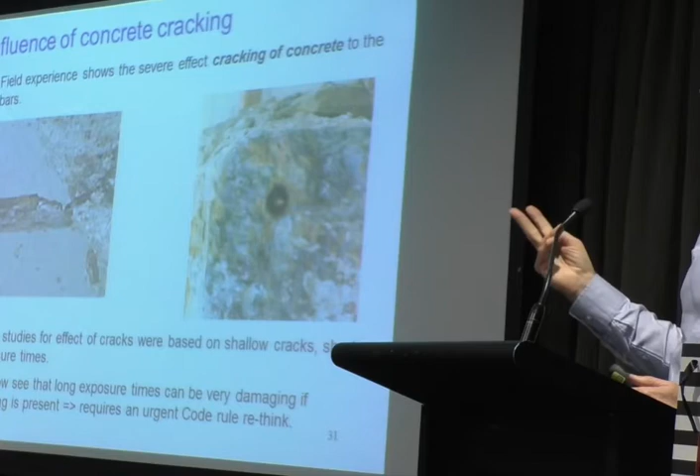And ferrous chloride is one of only two corrosion products. The other one is ferric chloride, which is soluble. So they can flow out in watery conditions. All the other rust products can't do that - they settle out.

For example, when I walk along the coast in Newcastle, there's a post planted in some concrete, and you look there and there's this brown rust stain. Now you've got to ask yourself, how can that brown rust stain ever arise there? It has to have been a fluid material that then became solid, because otherwise the ordinary rust wouldn't be able to flow around and settle - they're not soluble. So ferrous chloride plays an extremely important role in all of this, and I haven't got time to go into that.

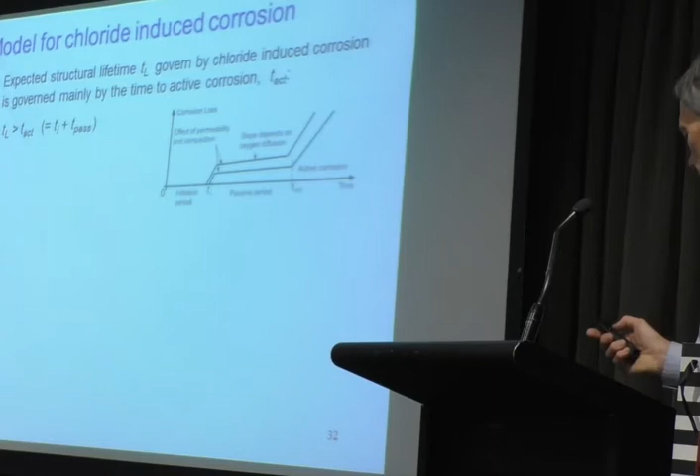Okay, how do we then think about lifetime prediction? Really, we don't care about this bit - we care about that time here. And that time now, in my view, is governed by dissolution of the alkalis in the end, and that's sped up by chlorides. So we just need to focus on that bit.

Now, we can use the results we've got so far, and they're for completely uncracked specimens - I keep reminding you of that. We can use that to make an estimate. And what do we get? Well, from the data we've got from our laboratory experiments, and remember these are laboratory experiments under perfect conditions, it's about 160 years for the sort of cracking that we would get for the Hornibrook Bridge piers. Now, they've already lasted 80 years, so we're in the right ballpark. We haven't quite got there, but remember, these things are all perfect, not completely perfect concretes. They're pretty good, but not perfect.

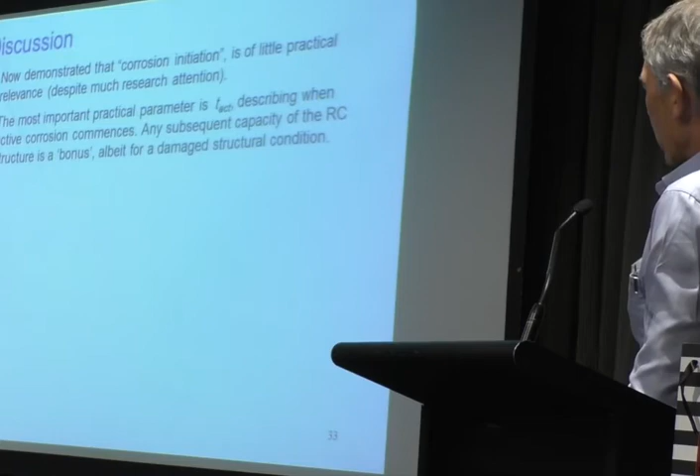Okay, so what have we got? We've demonstrated initiation - is of little practical relevance in the normal sense. It fits in with what we see. The most important practical parameter is this active corrosion time. And what you get, I would argue that what Carmen was talking about is a bonus. If you can get a few extra years of life out of it, that's fine, but this is really the important part. Once this has happened, you know you're in dangerous territory.

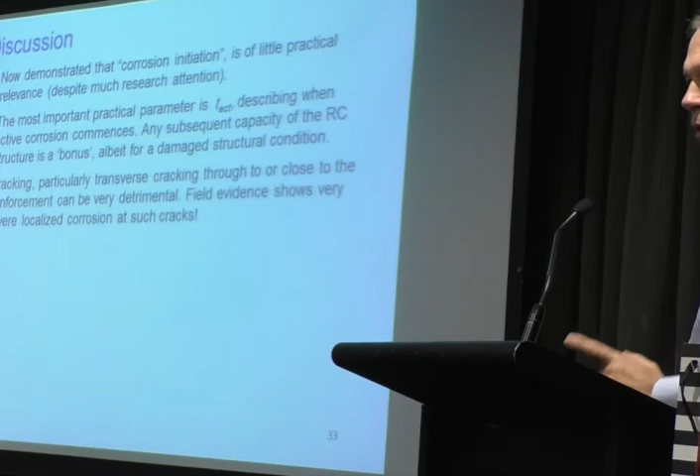Cracking - I've only talked about transverse cracking. I haven't talked about longitudinal cracking because we don't really see that in any of those cases we've talked about, unless you've got really poor quality concretes. Then you get a different problem - then the initiation leads to longitudinal cracking if it's a lousy concrete. The deep cracks permit inward transport of chlorides and oxygen, and out-leaching of alkalis.

Now, I think the important thing is that, in a way, if you start to look at the implications of what I've been talking about, it actually fits virtually everything we see in practice, and it kind of fits the fundamentals of corrosion science as well.

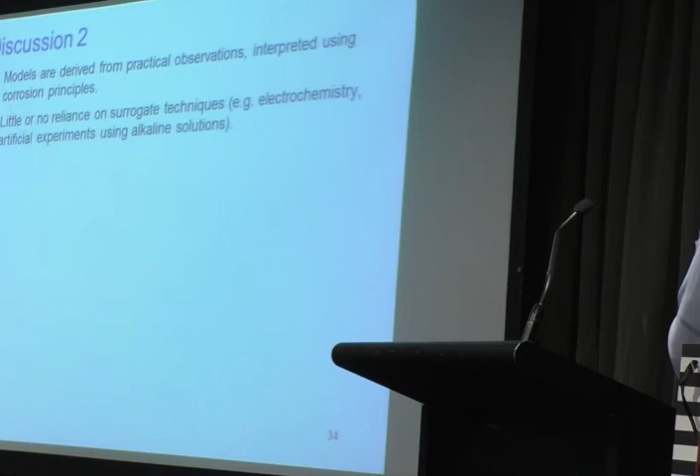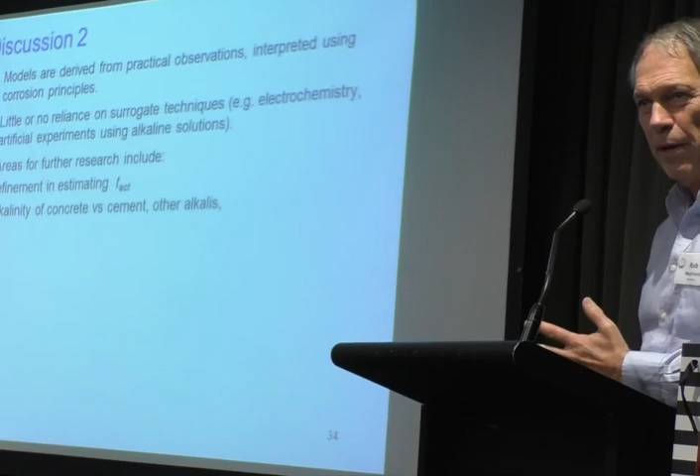We haven't relied on any of these surrogate techniques, but we do have some areas where we need to do some more work. We need to refine really how to estimate that time of active corrosion. All we've got is the initial results, which have only been published in the ACA conference so far and the European Corrosion Conference - the alkalinity of concrete versus cements and other alkalis. We've already hinted that if we have lots of other alkalis like calcium carbonate, things are actually better off. But I'm not advocating replacement of cement by calcium carbonate, mind you.

Not yet, anyway. The control of the internal surface area for alkali dissolution is important. The rate of chloride-driven alkali dissolution, how that changes - there's only one solid piece of evidence for that going back to the 1930s, which you can read about in the paper. So there's quite a lot of work to be done that's now coming out of the way we're thinking about it.

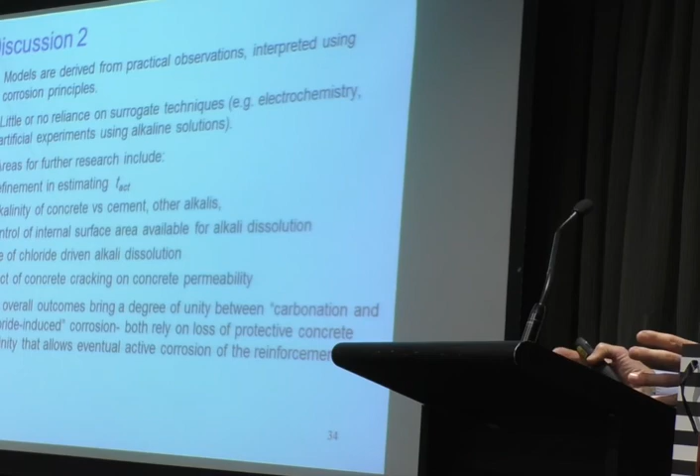But the nice part about this, if you like, from an overall perspective, is it gives us a sense of unity between carbonation-driven corrosion and chloride-induced corrosion. Fundamentally, it's the same underlying mechanism - it's the loss of alkalinity which causes the problem.

Now, look, I've said all that. I'm going to skip over that because I'm running out of time.